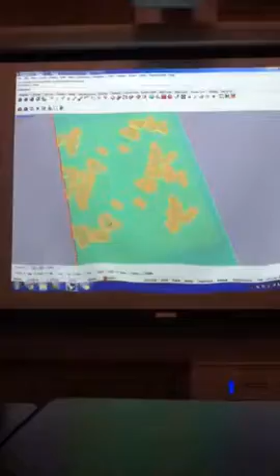I'm saying, like, when you go to work on the section, how does it become like an office building, with concrete slabs and glass curtain wall?

Walking there, you see... this morning, it's funny, in Gowanus, in the middle of all this other stuff, there's this scrap metal yard, with like 3 cranes going, and I was thinking immediately of your project - you were thinking about your project too, right? These cranes pulling out all this scrap metal.

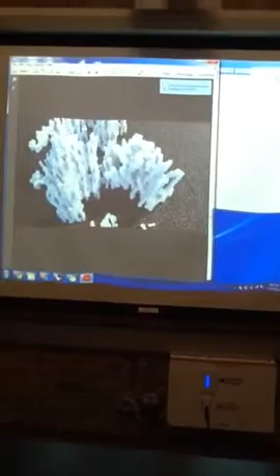From the Whole Foods parking lot, yeah, near there - I'm sorry to admit, that's where you can see the full view. And I had to think about your project.

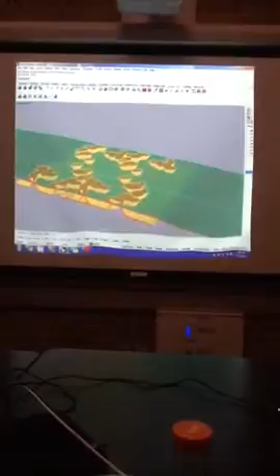Right now the language is completely going a different direction, maybe not quite the way they want to go. And then I think this kind of transitional geometry is a little bit more work.

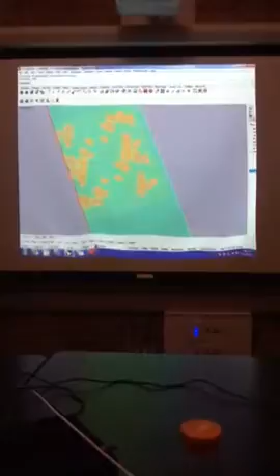Go and watch Wall-E again - maybe the scale of your layers is way too coarse, because it implies a layer is a floor, right?

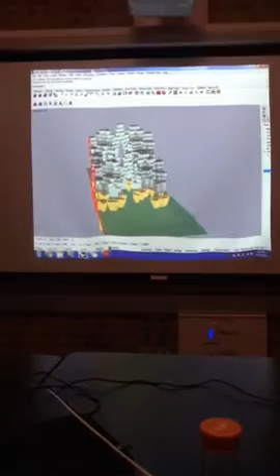But I think these garbage volumes, cubes, are not quite of that same scale, right? And they don't turn out to be sort of curtain walls. You know what I mean?

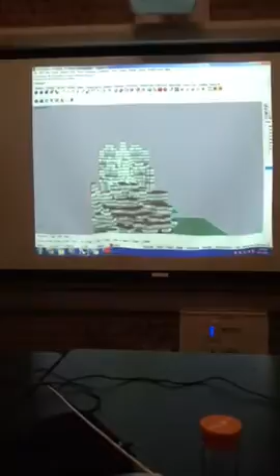That's only for the section - I was like trying to understand. I'm not thinking about the curtain. But it kind of reads like that. Yeah, definitely.

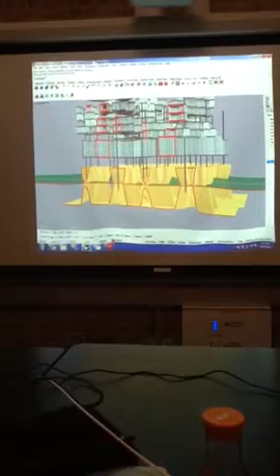The bottom somehow seems to be more promising. Because it's solid, right? Yeah, it's totally solid. But I'm trying to have some parts which start to be habitable, so it just doesn't become like that.

Well, I think that's what I'm trying to get at. Like, that's totally impossible in your thesis. It's solid.

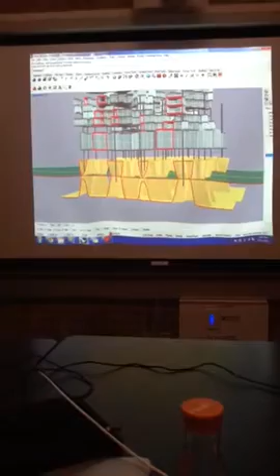It's totally connected to just that? Trust me for a minute. Can it connect to totally that? Impossible. So why would you try to do it?

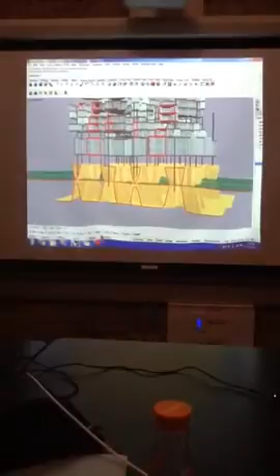But I think what I'm realizing is, I'm not disagreeing that this could be inhabitable. I'm just saying it's totally solid. So you have to imagine for your thesis a different kind of form of inhabitation of this, right?

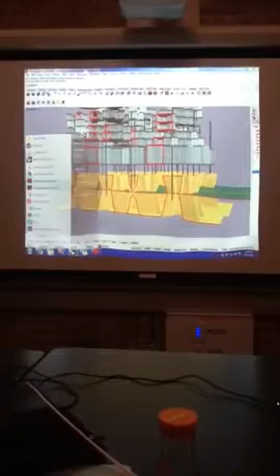I don't even think that in this project - correct me if I'm wrong - but once it's like you're going to go in and carve out spaces, put doors and windows in them, like the Cliff Kiva or those kind of southwestern inhabitations that are carved into cliffsides, which is super awesome.

But actually, maybe that would be okay. No, I was thinking more as - it's solid, so you would have to be kind of ingenious about some other way to not just occupy the naturally occupiable gaps, cracks and crevices, but build some scaffolding around it.

I think there's almost several really clever and creative things you could do with this, so long as you don't try to carve it out and get inside it. That's why I'm being such a pain right now, being really insistent about this.

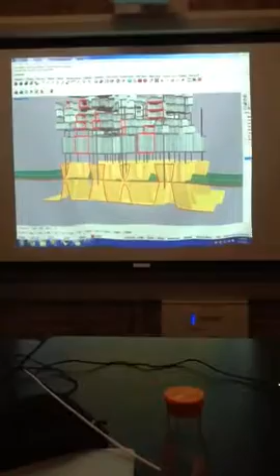You need to invent something that's more in line with your thesis premise, right? You can't become a regular office building with no differentiation, other than a slightly different floor height every now and then.

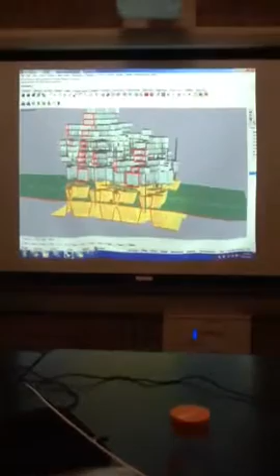And I think if it's about this sort of transitioning the geometry from bridging to tunneling, it's not so clear how the geometry works. That's what I was trying to have, like have this pathway.

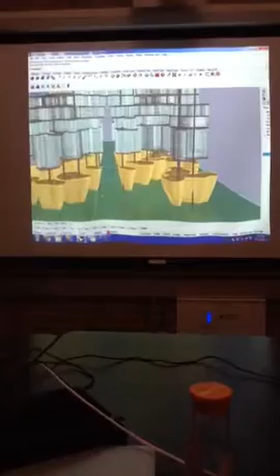Why is there a level missing at the bottom? Why does this level not continue? Because I was trying to have this more organic, but I couldn't finish it yet.

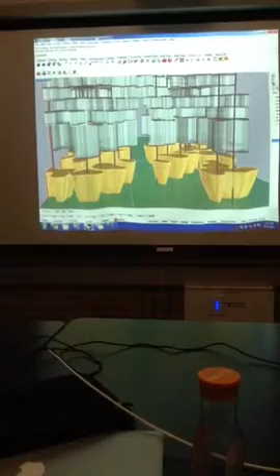So this has to meet the building in a way - you call that the top of the building and the bottom is almost... just to explain how we're supposed to read it.

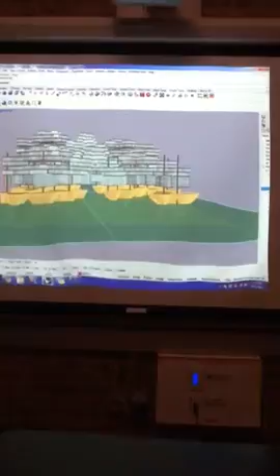I don't know, maybe you mentioned this already, maybe I'm totally off base, but in the beginning of the semester, didn't you have an idea of what the trash would be compacted into? There was a size and a shape, you'd have a lot of these, and you would use them to start to build this thing.

But now you just have these sort of mashed together - like this yellow thing doesn't look like anything made out of a unit. If people are dropping off cubes of trash that are pre-compacted, that's going to look a certain way. If they're a certain size, a certain shape, that's going to inform how this thing looks. This doesn't seem to have that.

So actually in section, this part above the mean height level is all going to be reef - coral reef. Okay, and then - but even the reef is made out of trash, right? Yeah, that's what Hannibal is referring to.

The question is a question of scale, whether a pixel here is the size of one of these boxes or whatever. Are they boxes? What shape are they? Yeah, they're pixels basically.

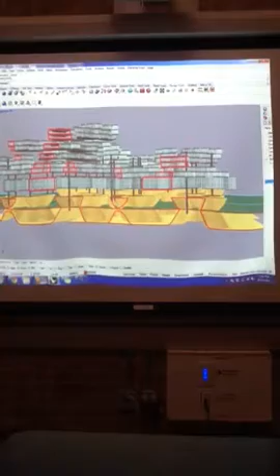But then why is the stuff above so striated - something that's hard to make with lumps of trash?

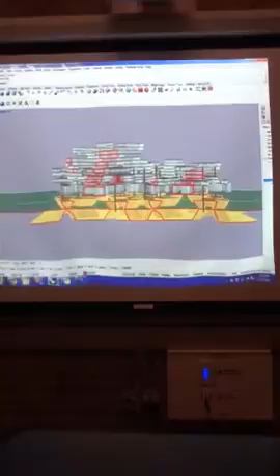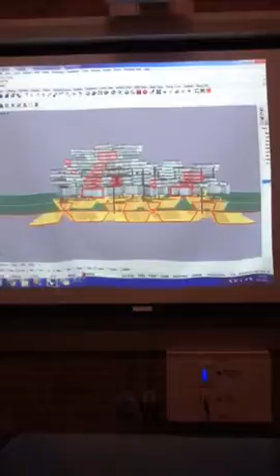So I tried to basically understand how it's working, and then again take a step back and start doing that, because last time was more of a formal approach - how it looks - and then start to understand how the section actually works. So I'm taking a step back to understand how to work with the section, then go back to how to populate and carve out what stuff could be carved out.

So I'll watch Wall-E again. Sure. It's my favorite movie. Good, I'm glad. All right.